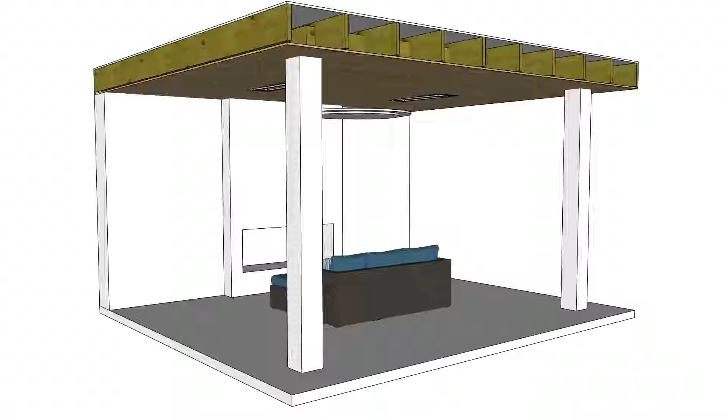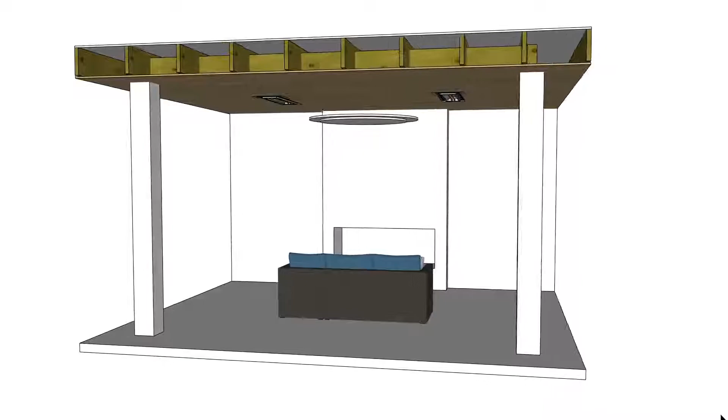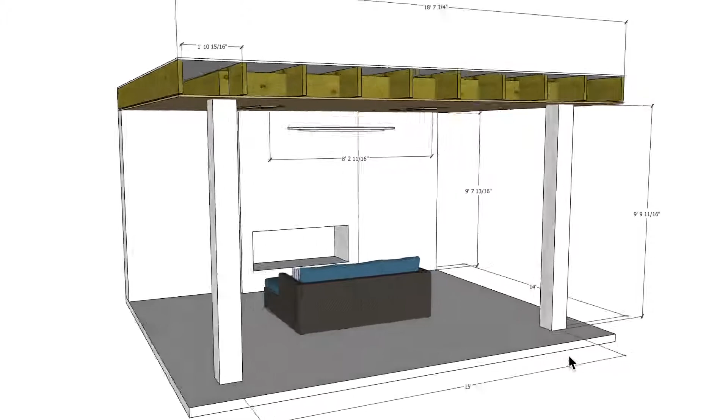Now let's get heating. All right, so this drawing here is a customer who requested a placement option for his units that they purchased from us, and I just want to go ahead and show what I would recommend here. So first of all, let's go ahead and look at the overall dimensions, and let's get that on here real quick. So overall dimensions, I have post to post 15 foot, 14 foot to the center of the post that's inside here to the post here, and then I have a couple different elevations.

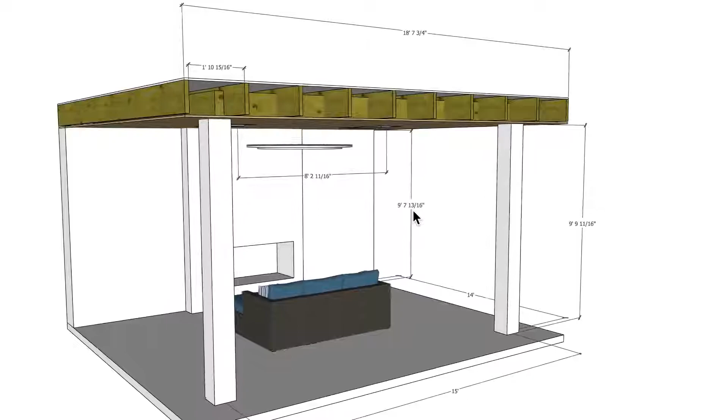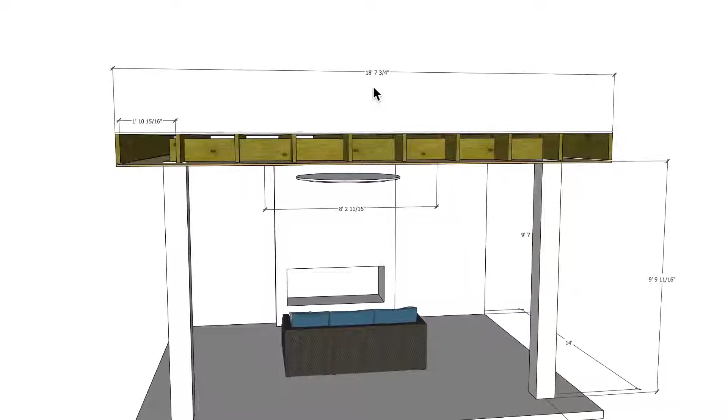I have 9 foot 9 and 11/16 out here on this edge, and then on the back side 9 foot 7 and 13/16. Now those might not be exact, but they should be fairly close. Also, I noticed in their drawing that they provided that they had these joists going across here, and you can see I think I have 11 total, so 1 2 3 4 5 6 7 8 9 10 11. And I spaced them out evenly between the 18 foot 7 3/4, and that would give me a clearance or a space between of 1 foot 10 and 15/16 from edge to edge.

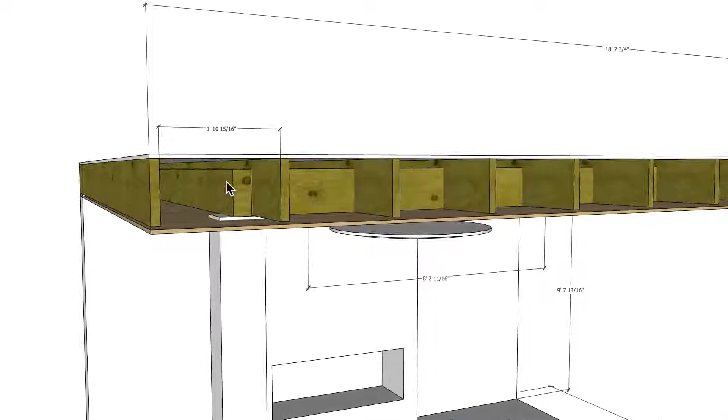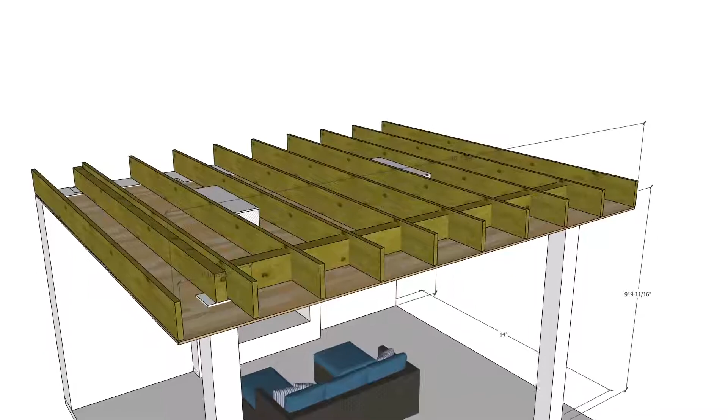I have these at, I think these are 2x10s, and then we have a 2x8 over here. And you can see here my placement. Based on that information, I was able to place it between here and here, which is roughly 8 foot 2 and 11/16 center to center on heater. And then I'm going to go ahead and just talk about something else just real briefly. I'm going to go ahead and turn off the dimensions. So you can see I have these centered within the space.

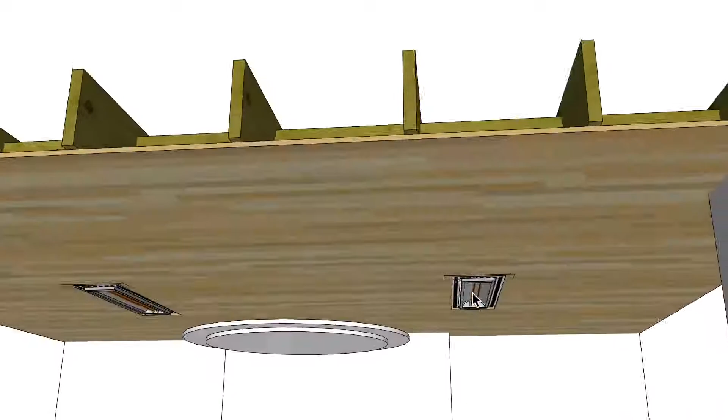Now you can move them all the way over to the edge to get a little bit better of a footprint, so that you can move this section here all the way to the right to that 2x10 here, and then this one over here to this 2x10 here, and then punch your hole through there. That might be an option for you, but more importantly I wanted to talk about how to actually place this unit in here. So we have this 1 hour fire rated drywall placed in here, and then you would box that in with 2x8s at least. You need a minimum of 8 inches of height here,

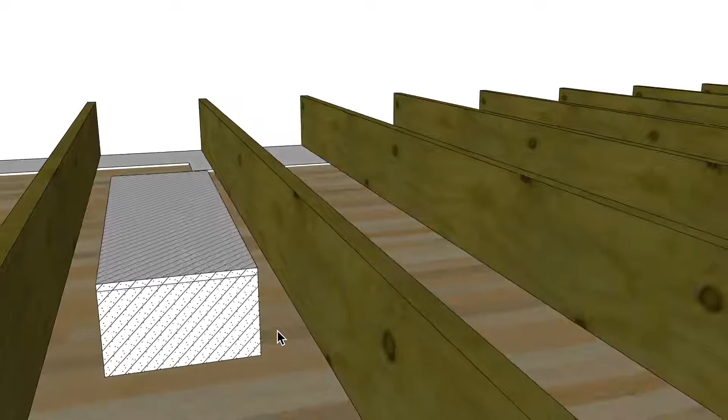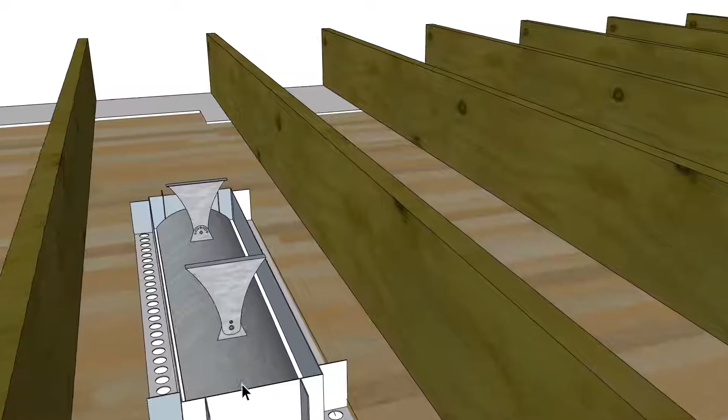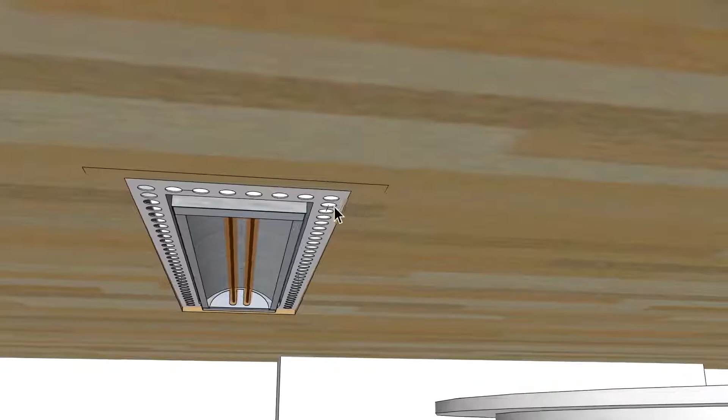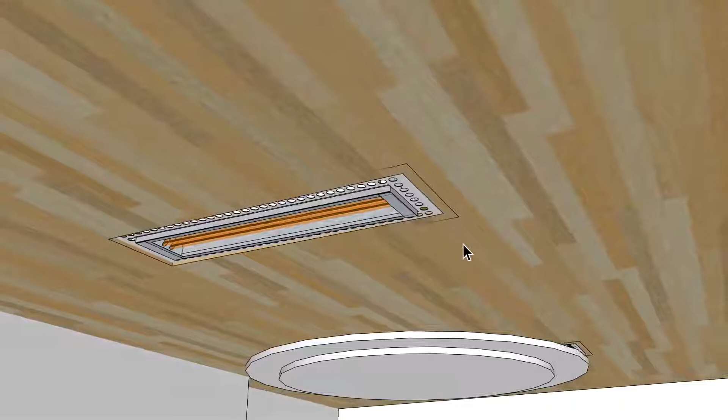and once you box those in, then you have the unit itself. So let's see if I could just delete that out of the way for a minute. And you can see you have the flush mount frame and then the heater itself. So those are the 3 different items that you're going to be installing in here. Now this flush mount frame can fit on the framing of your boxed out area, and so then also if you're going to do a surface mount, you can drill a hole through the flush mount frame. Now you can see here I have this flush mount frame recessed behind this, I guess they're going to be tongue and groove or some sort of wood on the top finish. So I have that recessed behind that.

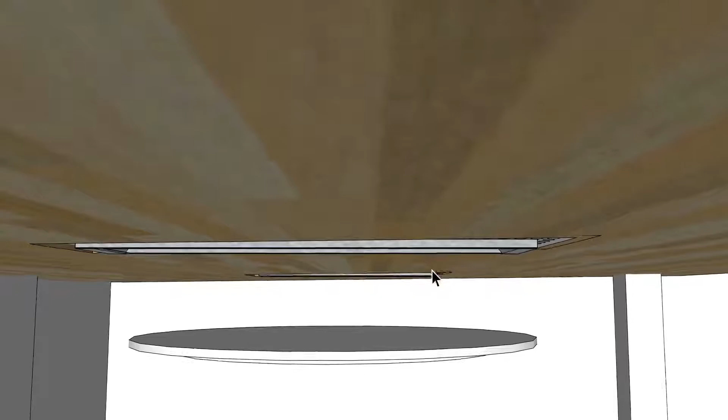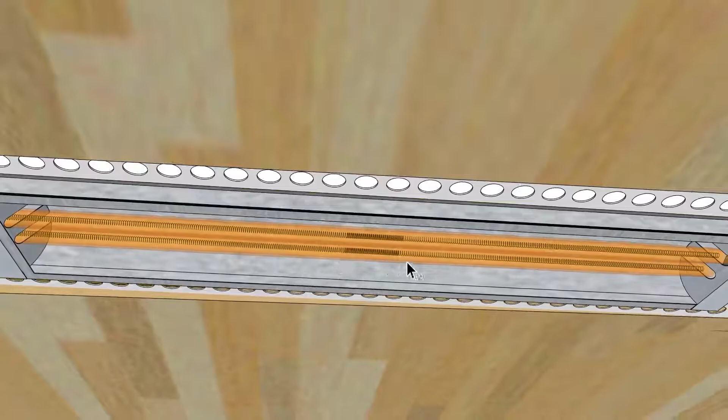Now it's not going to be level, and that's the big issue that I really wanted to talk about. So if the frame itself is not level, we really want to make sure that the frame and the heater itself is level. If the frame is just off by a slight bit, we want to make sure that the heater itself is level, because inside of the elements themselves, you might notice here is a nichrome wire that goes across here, and that nichrome wire, as it heats up, it will expand, and as it cools off, it contracts. And as that happens on a per use basis, eventually it's going to go downhill, whichever way that downhill is, and it's going to gather up on one side and then cause a hot spot, which will cause it to burn out very quickly. So you want to make sure that the heater is level.

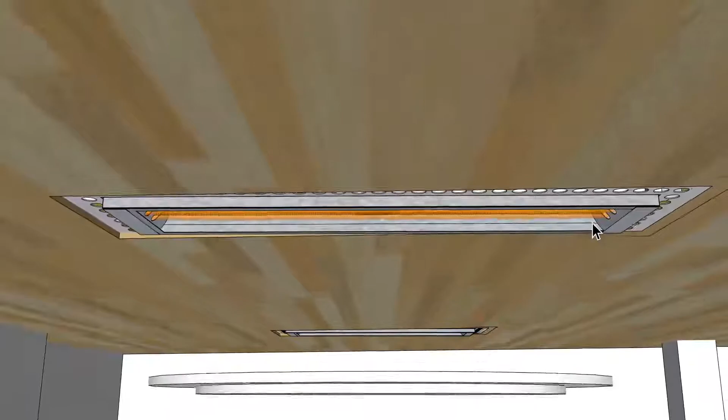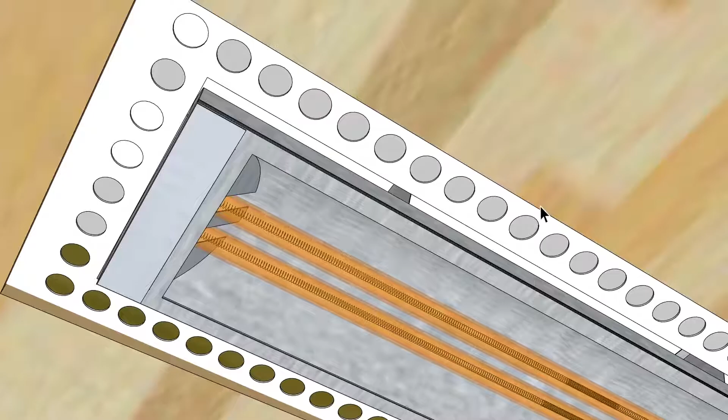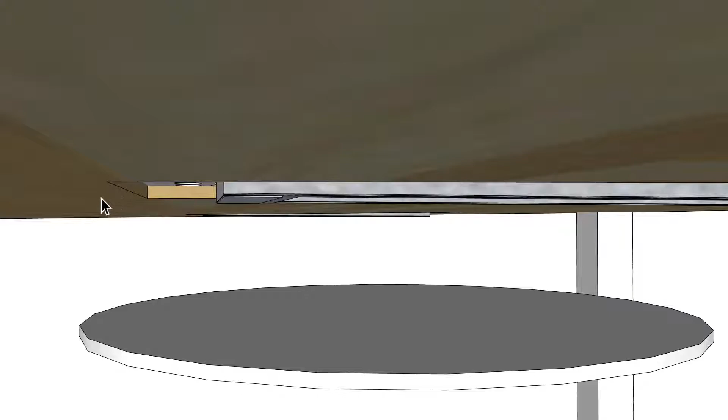And then also, if you finish it off like I have here, we want to make sure you have a 1/2 inch gap between the holes themselves and any finished wood. True on all sides, 1/2 inch from here to the edge of the wood. And then also you want to make sure that your elevation of your heater is at the minimum of the elevation of the wood, meaning that this being the low side, this has to be at the same elevation as the low side of the wood trim, and then this is going to be even further out because this is the higher side.

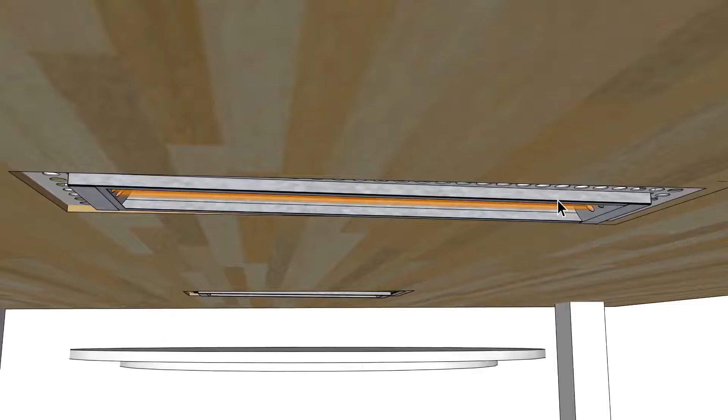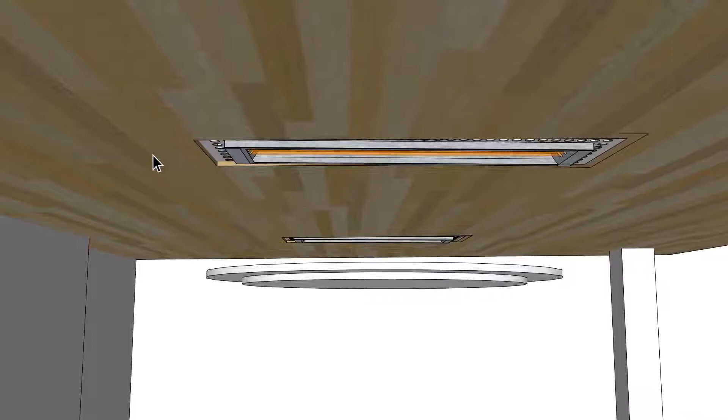In the flush mount frame, there are 4 tabs, one on each corner, and you can allow those tabs to droop down a little bit further on one side versus the other to get the heater to be level, as the heater actually is suspended by gravity on those tabs. And I should say as well as allow the heater to meet the clearance to the wood finish up here. It needs to be at the same elevation, the bottom of the heater to the bottom of the wood itself. All right, so that's something that's really important.

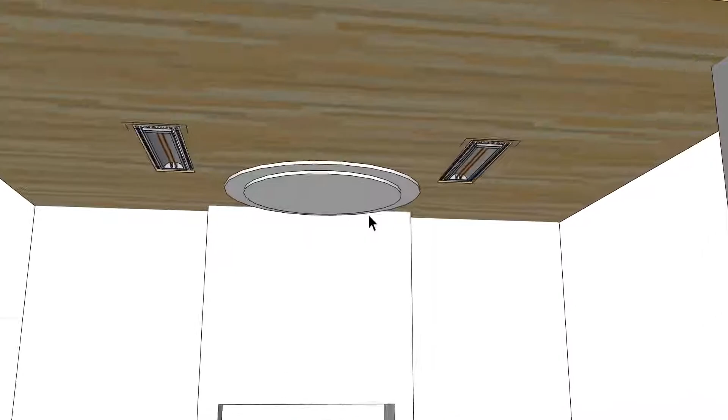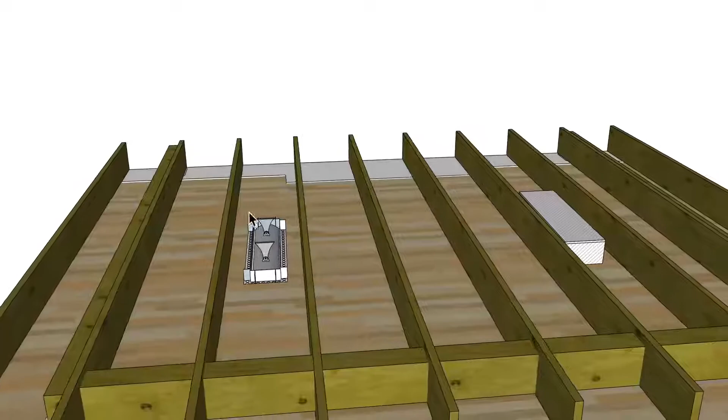Then he also mentioned that there was going to be a fan in the center, which I placed here, just a couple of circles, one being a 4-foot and one being a 5-foot diameter circle. So you can see here now with the clearances that with the 4-foot we don't have that issue, and with the 5-foot we do. So maybe moving that over a few inches will give you that clearance that you're looking for if you have a 5-foot fan. And that's only based on the fact of if my clearances are true, which, again, we have that clearance of 1 foot 10 and 15/16. All right, well, I hope this has helped.